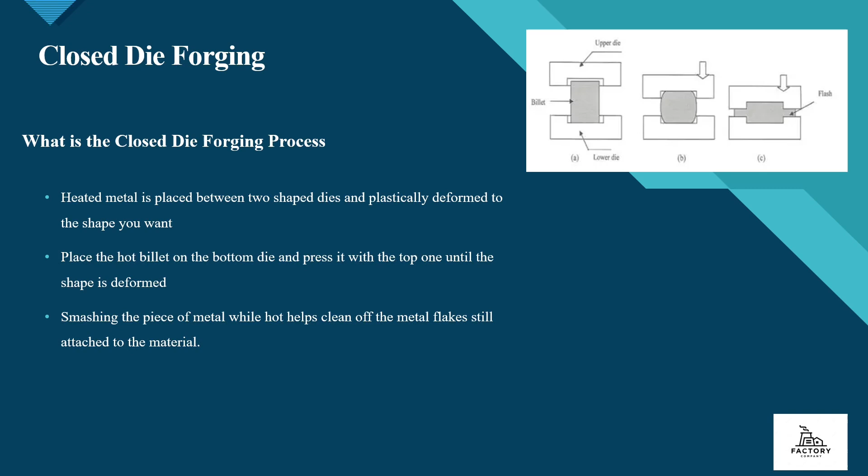Powdered forging begins by selecting the required metal powder and compacting it into a precise die to form a green preform. The preform is then sintered below its melting point so the particles bond and harden, creating a structure that is strong enough to be handled, but is still not fully dense. Once sintered, the part is reheated and forged in a die for final shaping under pressure to achieve the maximum possible density for that chosen material.

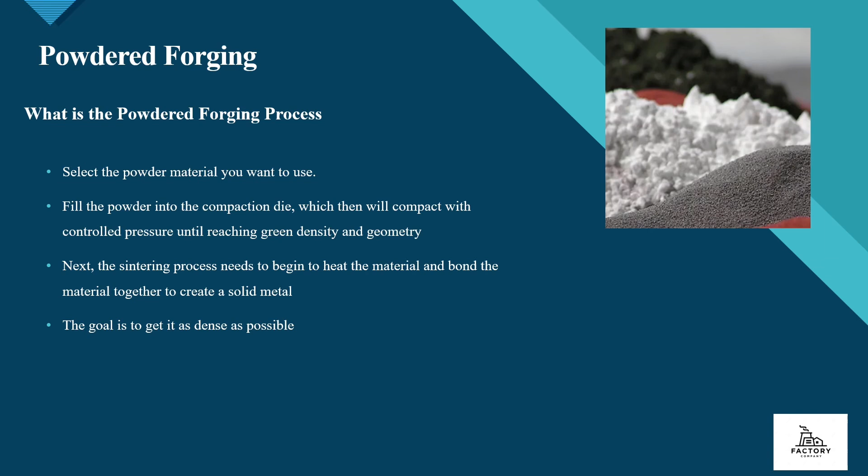Now, some advantages of both closed die forging and powder forging. Starting off with closed die forging, it provides strong mechanical performance because the grain flow follows the part geometry, which significantly enhances fatigue resistance and overall durability. This enhanced strength makes it ideal for applications where reliability and structural load are priorities, such as automotive and aerospace components, and it also supports a wide range of part sizes. Additionally, the dense microstructure produced by forging reduces the likelihood of internal flaws, contributing to consistent performance even under demanding conditions.

Powdered forging offers advantages in producing durable, high-temperature components with less manufacturing difficulty. It also supports high production rates and near-net shape forming, reducing machining time and minimizing scrap. Because the process utilizes controlled powders and sintering temperatures, manufacturers can more precisely control density, hardness, toughness, and even magnetic properties than with conventional forging methods.

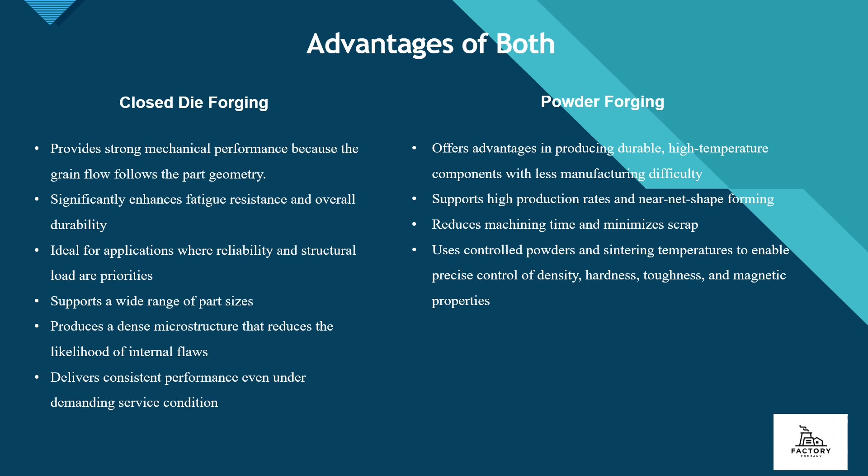Now, talking about some disadvantages, starting off with closed die forging. Closed die forging has limitations because its microstructure control is less precise compared to powder-based processes, which can be engineered at the particle level. The process also struggles with highly detailed geometries, and many parts require secondary machining to achieve tight tolerances. Additionally, design changes often require new dies, making the approach less flexible for low volume production.

Now, with powder forging, part sizes are limited, and most commercial presses top out near 40 to 50 square inches, which restricts the range of components that can be produced. Complex shapes can also be challenging for inexperienced operators, needing precise process control to prevent defects. Most importantly, powdered forged parts typically do not reach full strength and ductility compared to traditional fully forged or cast iron components.

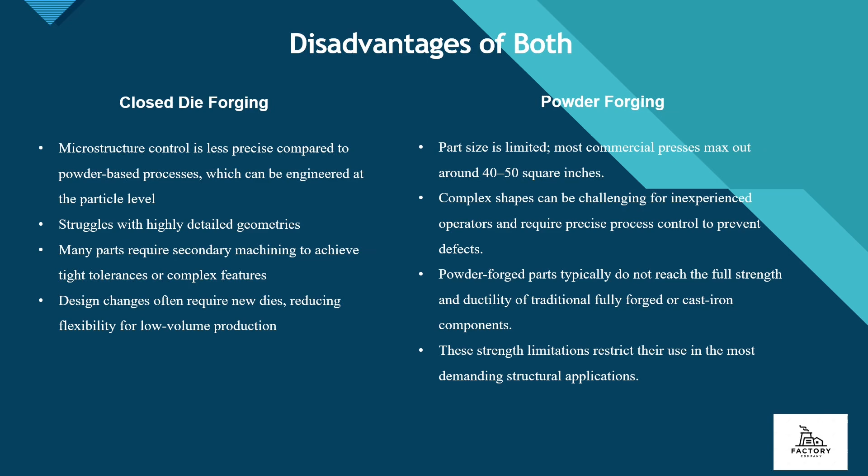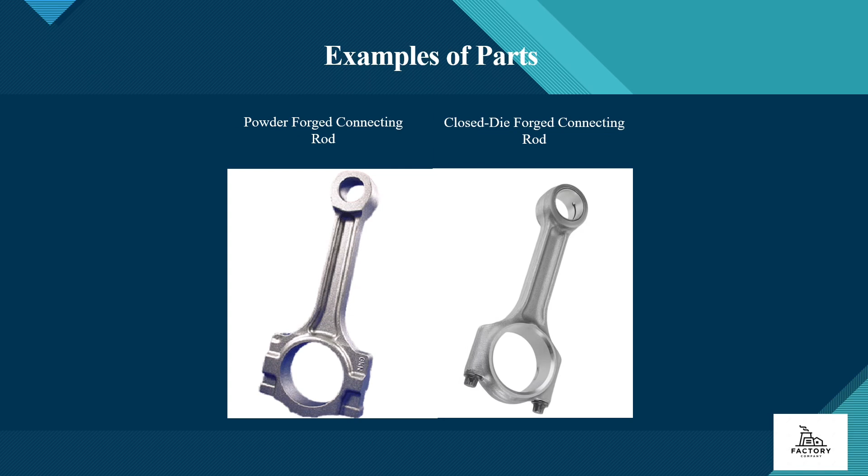Now here's two examples of connecting rods, both powder forged and closed die forged. As you can see from the pictures, other than the small discrepancies that are there because of how they wanted it designed, they are pretty much similar on the outside. This is showing us that most of the differences are within the properties of the parts.

We will now look at the cost comparisons between the two manufacturing processes. An advantage that powder forging has over closed die forging is that there is virtually no material waste when a powder forging process is complete. Powder forging also has a cost advantage in being the more precise process. If there are complex parts to forge, there will be less material waste and it will take less time to form, which will develop a lower cost.

Closed die forging has advantages in normally requiring less post-processing machining to gain desirable surfaces or dimensions. It is also cheaper to buy conventional bulk material instead of powder feedstock. There is a workaround to this problem, and it would be to use scrap machining chips as feed for the powder to forge instead of conventional metal powder. Studies have shown that this can lead to a 25% decrease in material cost. If the feedstock cost is closely managed, powder forging can have significant cost advantages in material utilization and waste management. The part geometry must also be favorable for the process as well.

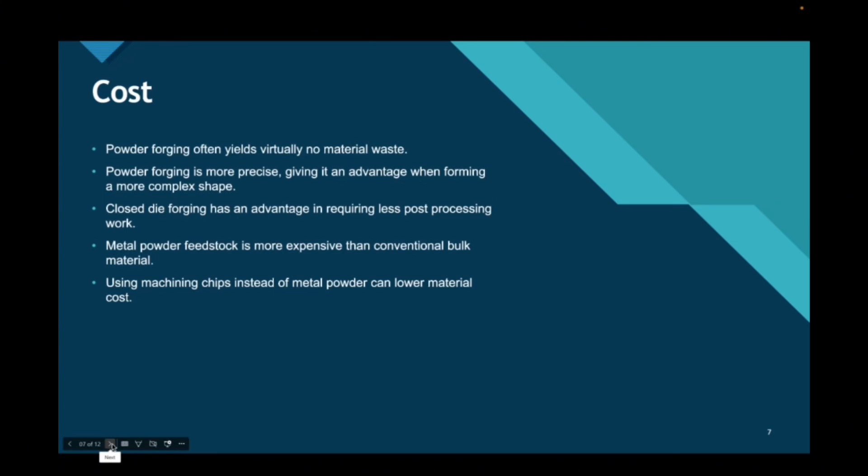Next, we have prepared machining readiness level topics for a powder forging process. Firstly, if powder forging is to be used, it must be determined that the parts will be the correct size. This means not going over the 40 to 50 square inch limitation. It would also require new equipment to move into a powder forging process, including a powder metallurgy press and sintering furnaces. The existing conventional forges can be used for part finishing.

Demand for powder metal is very high right now as the industry continues to grow from advancement in new research and mechanical technology. Pricing for steel material powder is around 12 cents per gram. If the part can be made with a weaker material, iron is a cheaper option. As mentioned before, scrap metal chips are also a cheaper alternative, but the parts may require more post-machining if done this way. The complete production cost will also include the cost of labor, tools and die cost, and indirect costs from other processes.

The biggest safety risk from the powder forging process will be the fire risk from the metal powder and dust. This dust will also be able to cause eye and skin irritation to workers if not properly dressed. There will need to be schedules created for an accurate projection of parts created per week and month, also to maintain efficient use of the powder material. Dimensional requirements will be set on a part-by-part basis either by our team or the buyer of this part.

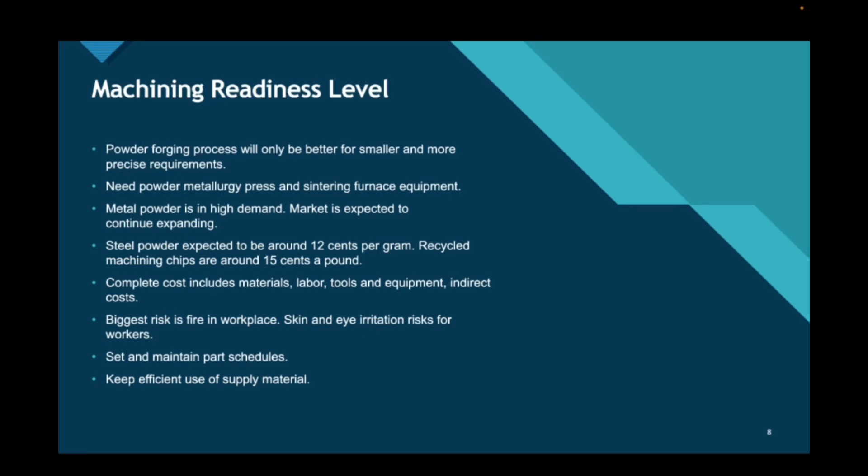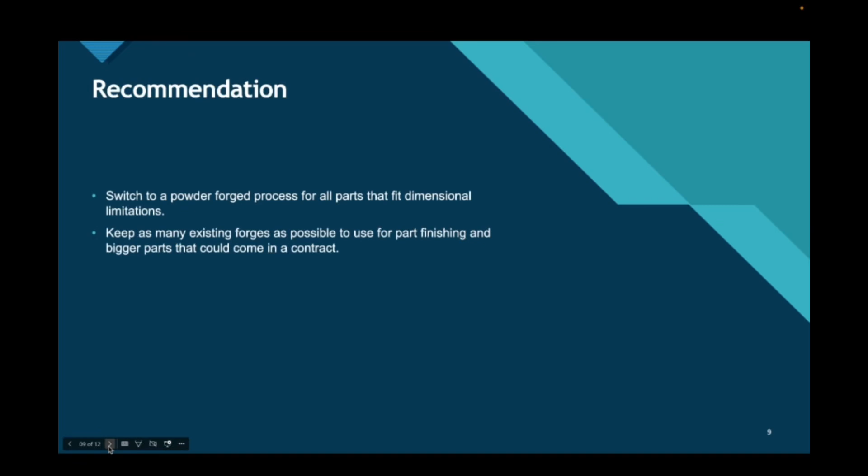After all the research done between the two processes, we recommend that the company switch to the powder forging process for all parts that can be made within the size limitations. Based on space requirements, it will be best to keep as many existing forges as possible for finishing and the possibility of still keeping contracts that have parts too big for a metallurgy press. This decision is made to increase the production capacity of the units while maintaining high precision on part shapes.

Thank you for listening to our presentation on powder forging research and how it will look for our company. We believe this process can be key to improving our company's total production and profit.